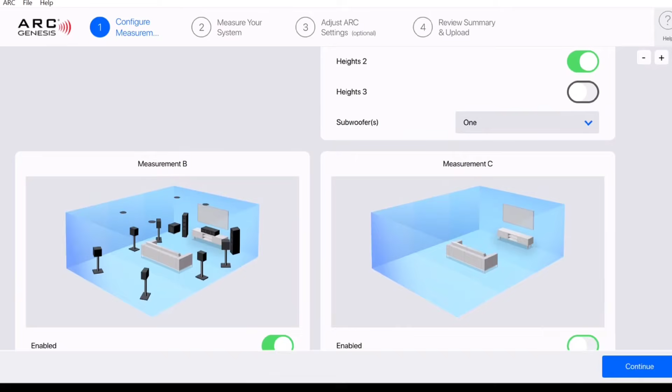Let's go to profile B and let's turn that on. So that's going to give us another set of measurements. Remember, profile 1, or measurement A, is our main profile. That's going to be, in this room, the main listening area or main listening setup for movies. Okay, profile B, or measurement B back here, that's going to be the second profile. Maybe that one's a back row listening position. So maybe we're going to use all these speakers, but the mic is going to be based on another row, not the front row. We would leave all the speakers as they are.

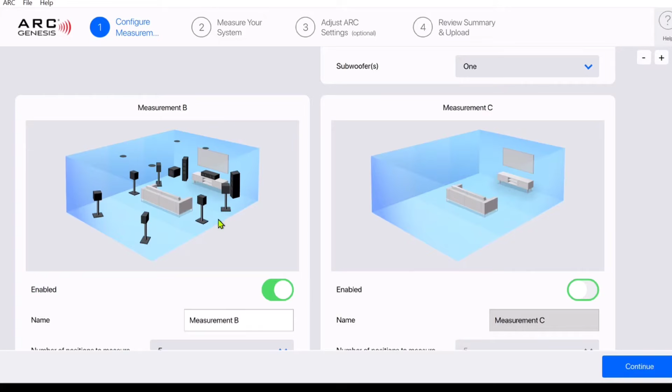Now, if it was a 2-channel profile, we would go and uncheck all the speakers and just have nothing but fronts. All right, so now we've got a 2-channel listening setup with a sub. That's if we had 2 profiles, which we don't. So notice the sub in the corner - that's just for show.

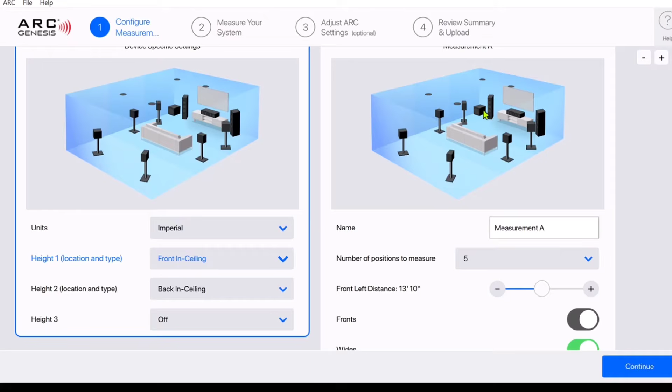It's just saying, hey, we got one sub. Your sub may or may not be in the front corner. We do need to do just a little bit of work. We need to go and measure the distance from the front left main to our ear position at the center of the listening area. So that's going to be right here, dead in the middle.

Now, if you have two seats that flank that, you're generally still going to use that spot right in the middle. Now, if it's all about you, and there's nothing wrong with it being all about you, if you want it to be just about one specific spot, maybe you sit in the middle or maybe you sit just slightly left of the middle, you can measure to that, and that can be your main listening position where everything falls on that one single point. There's nothing wrong with it being based on your spot.

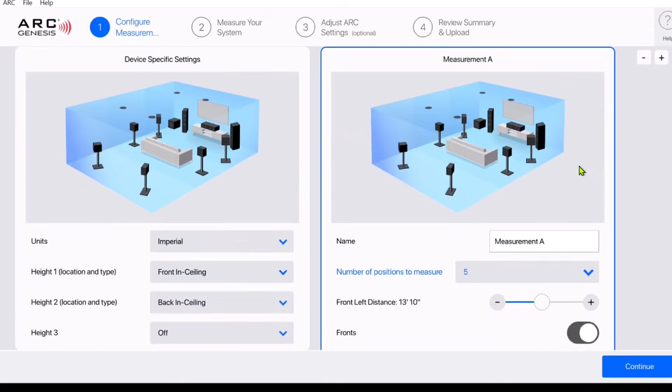Now right here we can select how many different places in the room we want to measure from. You can select all the way up to 10. I would do anywhere between 5 and 8. Down here at the bottom, you'll select how many subs you've got, and after that, you're going to hit continue.

All right, no microphone found. This is kind of common with Windows, especially if you have an update. There's a fix for it, but the updates will mess up your fix. You'll have to go back and do it. It's very easy to do.

When this first happened to me, I jumped on YouTube and found a video from Barrett from Specs of Tech. Everyone say thank you to Barrett, because it's very simple, but if you don't know how to find it, it's not so simple and it'll drive you nuts.

So search for Device Manager. There we go. And you're going to go down to Sound, Video, and Game Controllers. And you're looking for the one that ends in USB audio, right here. Right-click on it, Disable Device. There you go. Now it's going to find your mic.

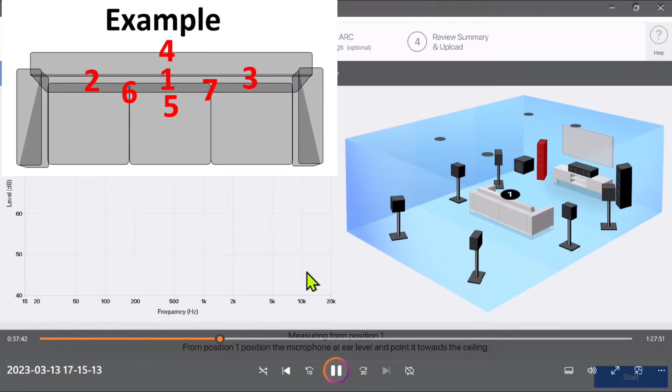Okay, so now it's time to start measuring. So position 1 is going to be pretty much where you see it on the screen, the center of the listening area, the center of the room. So we're going to go ahead, we're going to set the mic there at ear level where the seated head or seated ear is going to be. Make sure it's not blocked by any furniture or seat backs or anything like that.

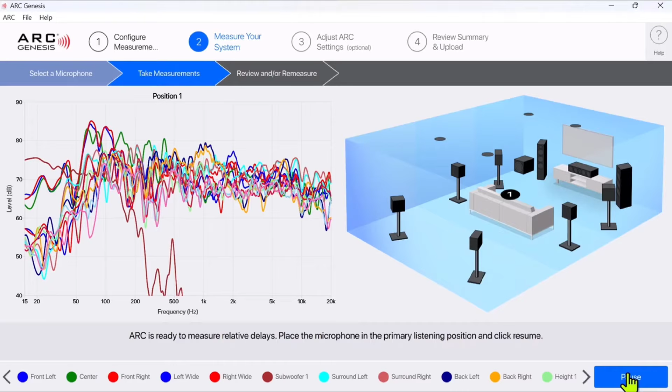Now, as you look at the bottom, you'll see ARC is ready to measure relative delays, and it's going to use the left main as a timing reference. So it's going to play left main, then right main, left main, center, left main, wide, left main, surround. It's using that left main as a timing reference, and this is pretty fantastic. This is something ARC couldn't do for a very long time, and everyone was waiting for it because Dirac could do it. Now ARC and Dirac both do it. It's kind of brought ARC up to a level playing field, and ARC also has some things that Dirac doesn't, which we're going to go over here in a little while.

So now we're into position 2. At this point I'm measuring where I actually sit. I sit on the left of center, my wife sits on the right of center of the room. So this is actually going to be placing the mic at my ears, where my ears are going to be. We do not want to measure, for these initial measurements at least, anywhere other than where our ears are going to be.

Now we're sampling the whole listening environment. We're trying to, ARC's trying to determine what is the room and what is not the room. The speakers should be accurate. The speakers are not going to actually measure like they do on the screen. This is an in-room measurement.

Anytime you see someone post a measurement in room and it's perfectly flat, they have butchered that speaker to make it look like that, and it's not good, because it's similar to if you took your voice into a room and ran one of these sweeps through your mouth, and it was on a graph, and someone said, oh no, we've got to fix all these wiggles that the room has caused, and then they go in and EQ them. They actually change your voice.

Now the source is no longer accurate. We don't want to do that, so that's what we're doing here. It's why we're moving this mic around. We're sampling the environment, sampling the bubble right around where the heads are going to be. We don't want to go too far.

If we use a room mode calculator to place our subs, and we have a good seat to seat response where we have a similar response for the bass at our listening positions, we may know there's a null right in front of us, a foot back, a foot forward. We don't want to place our mic where we know we've got issues, like right here where number 5 is, that's probably where our knees are or where our feet are when we recline. We don't want to be out there. We may know there's a null right there. We don't want that part of our sampling, so we want to keep it where we know we don't have those modal issues, those subwoofer issues.

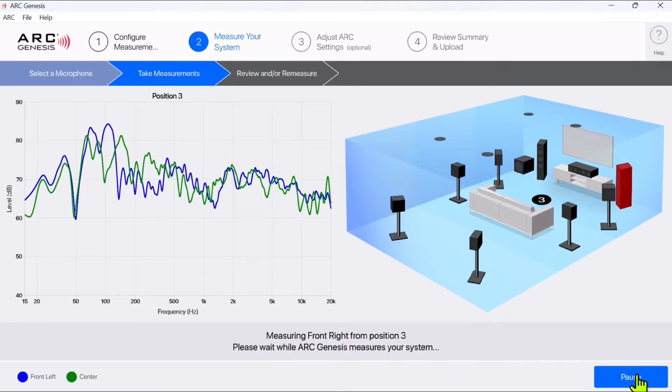So for this one, I would go up maybe where you are when you're seated. A while ago, the first two were maybe when you're reclined. Now we're going to get a seated ear position, maybe a foot in front of the reclined, just to understand where you're at. You don't want to go too wide. We're just getting a sample of the listening area, not the whole room itself.

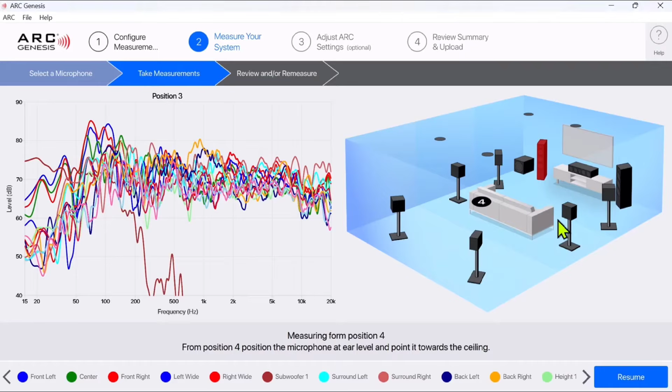Okay, here we are, position 4. Again, behind us, we're never going to sit behind us, so I wouldn't go too far back, 6-8 inches maybe, just right behind the head. If you know there's a modal issue, if you know there is a null a foot behind you, be very cautious of getting too close to it. In smaller rooms, we're kind of threading the needle, placing the seated heads right where they've got to be, so just be careful about getting too far away.

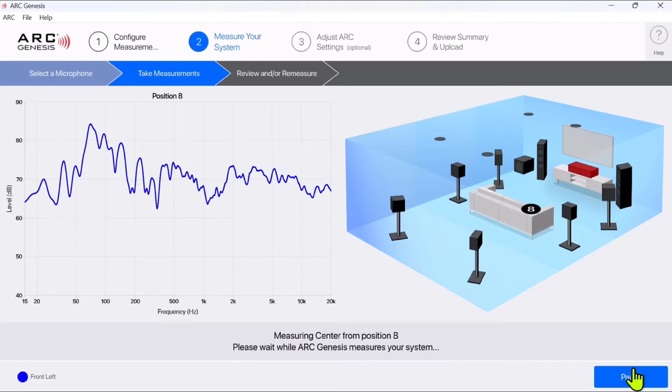Now, if this was a large open area, like a large living room, and you're all over the place, you may want to take that into consideration because your listening area is a little bit larger. You can put the mic between the listening positions and that very center position if you want, depending on how your room's set up. You're just sampling the listening area.

Now, I do want to let you guys know, when I plugged ARC's mic into my computer, it took over the mic that I was talking on. Didn't even think about it, it was a duh moment. So you couldn't hear me during the adjustments I made to my room. I did not, and I'd already saved the file once I fixed it and touched everything up. I saved it, so I didn't want to have to go back and measure my room again.

So I just jumped on Facebook, on Home Theater Gurus' Facebook page, and asked all the guys over there for one of their raw files from ARC, and that's what we're looking at right here. This is the first guy that said, 'Hey, I've got one, I'll give it to you.' So we're going to do his room, and then I'll send him this file when we're done.

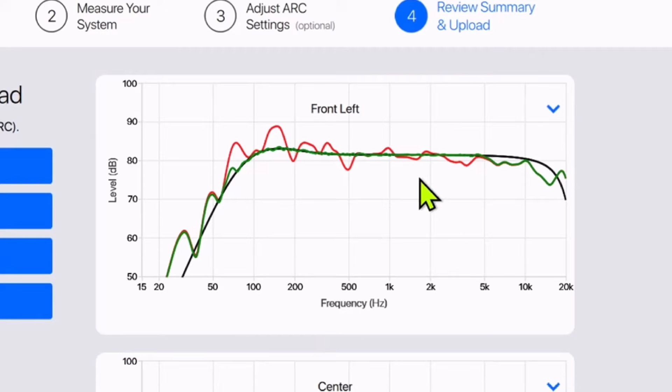But let's go ahead and hit the review button. Now that black line is going to be the target all throughout these settings we're going to be doing, it's always going to be the black line. Now here the red line, that is what the speaker measured, or when we sampled the room, this is what ARC came up with for the front left speaker, the center speaker, the red line. Now ARC EQs by default up to 5,000 hertz, 5K right here. Okay, so now we're zoomed in, but that green line's hugging that black line all the way to 5,000 hertz.

And then look at his response. Now, I measured with REW just to confirm, this is what it looks like. So you're losing all your top end from 5,000 hertz, it just starts taking a dump. I mean, at 10K we don't hear very well over 10K, but still it's not going to sound good. Say he just got the speakers, he's demoing these new speakers in his room, he runs ARC, and it doesn't sound good. These speakers don't have any highs.

Something's missing in the upper end. All along, these speakers may be great speakers - it doesn't mean it's this speaker. It's just the room correction needs to be done. It needs to be finished.

By default, ARC, like most room corrections out there, isn't optimal. We need to optimize our room correction, go in and make some tweaks and adjustments that are going to drastically change the sound in the room. So there's nothing wrong with ARC, we just need to get in there and do some work.

Center channel, look at that - it's huge. These are 10 dB blocks right here, this is 70, this is 80. Look over here, that's humongous.

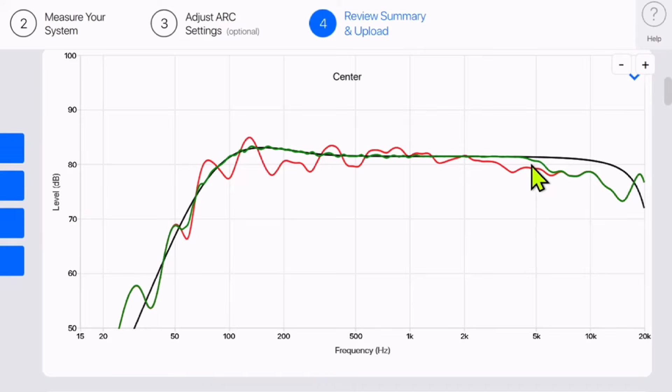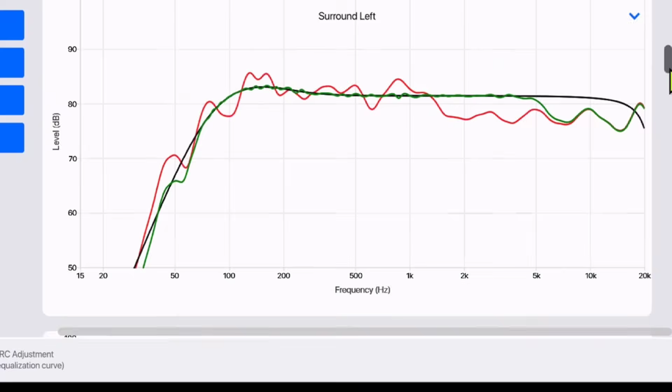Same thing with the center channel, left wide - his whole room. Because ARC, look at that left surround. So his surround, the upper energy, the spatial cues as objects are moving around this room are just not going to sound good. Now we can't pick on this guy's room because this is extremely common.

And the problem is ARC only EQs to 5K. Now that's not an issue, only EQing to 5K - sometimes you may not even want to EQ that high. Sometimes you may need to EQ all the way.

We need to look at it. But then there's some adjustments we need to make to fix what's not being EQ'd, to bring the whole target in line so you have a nice transition all the way across, so we don't have these big drop-offs. So that's what we're going to fix.

So the first tab, set up speaker profiles. We have profile 1. Now if you remember before, we talked about different profiles, and you can have a 2-channel profile. ARC has already measured all of the speakers from this position.

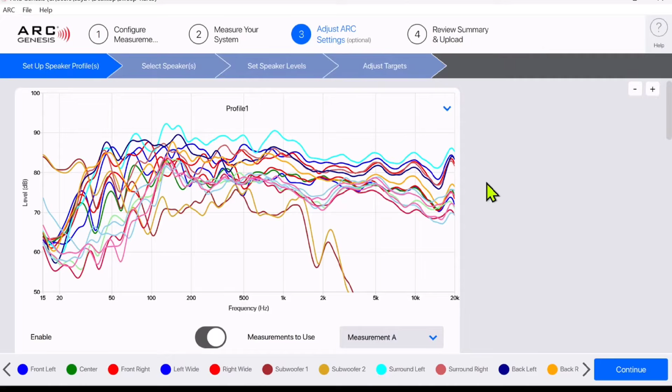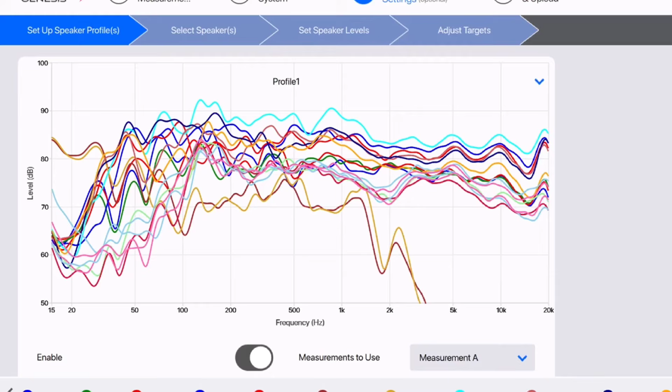Now if you look right here, measurement A, that is the measurement - we took measurement A earlier. If we wanted a measurement B, that would be measuring from a totally different area, like all the same speakers but measured somewhere else, like in a second row or a different main listening position, maybe on the same row but your position, like maybe you sit to the left of center or something like that. That would be measurement B, which we don't have, so there's no option for it. ARC took measurements from one listening position or one listening bubble only because we told it to.

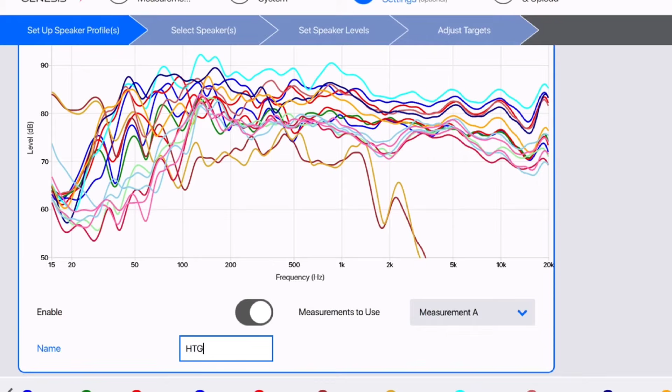All right, so we can call this profile whatever we want. Call it HTG for Home Theater Guru, so the guy knows when he uploads it, this is the profile we're making here. But you can use these measurements from measurement A that were measured in this spot.

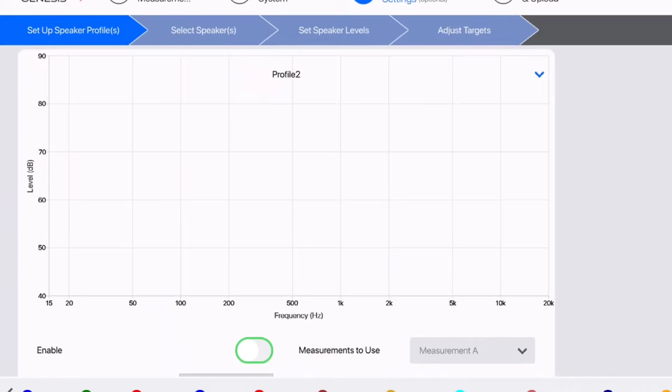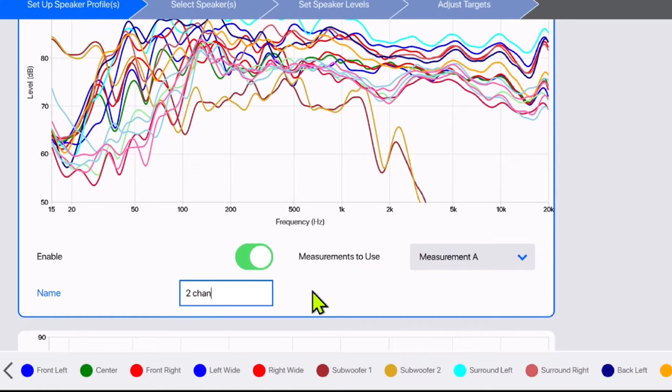You can set up another profile if you want. We can go down here to profile 2, turn it on, and there's all the speakers - ARC has already measured them. So we can go in here and call this one 2-channel. No, it won't let you type out the whole thing, you can't get the L in there, so it's 2-chan.

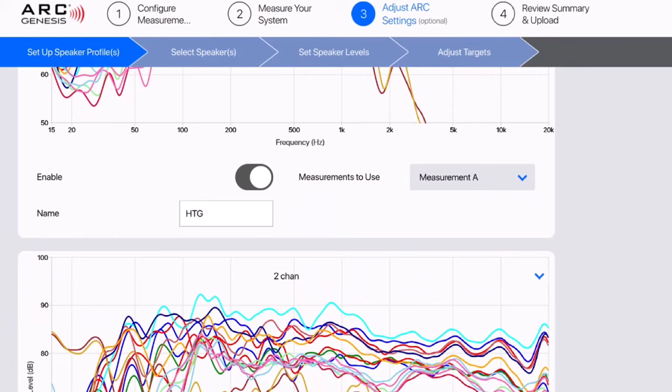So now we have 2 profiles set up - the HTG profile for the whole system, and a 2-channel one. So now we can go here to select speakers. This profile, HTG, we want everything, all the speakers to be played in that profile. Profile 2 over here is 2-channel, so we just simply toggle off the speakers that we don't want. And of course, fronts are required, so we can't turn those off.

All right, so now there's a profile set up for 2-channel. So now we hit continue and we can go ahead and start setting all that up. Now, we're not going to do a second profile because I just want to show you guys how to do it - it's really easy.

Now, of course, if we had different measurements for that 2-channel setup, we would have selected measurement B, because we would have called those B whenever we took the ARC measurements. So you can not only select the speakers, but you can easily select what measurement or group of measurements you want for that profile. Let's go ahead and turn the 2-channel profile back off because we don't want that. And because we turned it off, now it has disappeared from this screen.

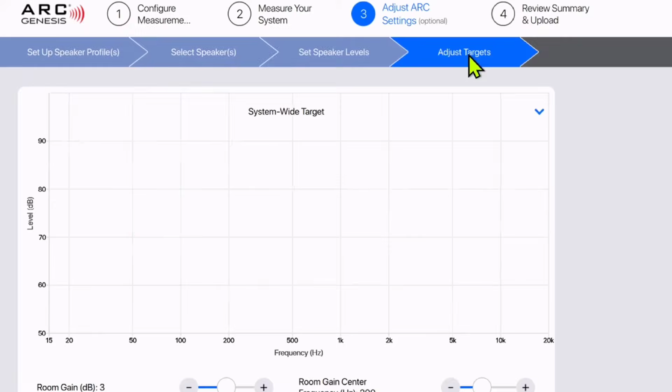Now we're going to go to adjust targets. We're going to skip this one right here, we'll come back to it in a little while. Okay, so the black line is our target. The one on the left, that's our subwoofers. The one on the right, that's our loudspeakers, the LCR, surrounds, everything not a subwoofer. So this is how we want them to measure in a room, the target we want them to follow. This is basically the tonality of your speaker, and we want all of them to follow this response as close as possible so they all have a similar sound. We don't want some to have highs and others to have none because of suck outs and stuff like that. So that's what we're going to be adjusting here.

Okay, now room gain. Let's watch what it does. It's just moving the left side. See the left side? It's basically turning the subs up and down, like the whole channel. Now it's also going to affect the lower end of the loudspeaker response, so it's kind of lifting the whole thing up. So we're going to set this at about 2.

Now this target is flat. Flat does not sound good. We have known this for decades that the human ear needs a house curve to sound natural, to sound good. Low frequencies don't lose as much energy as upper frequencies as they travel over distance. So we can't just have a flat response and have it sound right. It just doesn't sound right. So we're going to have to adjust this target.

Now there's been several studies through the decades, and one of the more recent ones is by Harman. They did blind testing to come up with a target that sounds good. Several other people have done this in the past, so again nothing new, but their target actually just sounds good. So we're going to use the Harman target and mimic it. Now this may not be identical to the target, so if someone sees something like you're half a dB off here, we're just mimicking the target. What we're going to do in here sounds really good, but you do need to tweak it. We're going to talk about some of those tweaks here in just a second.

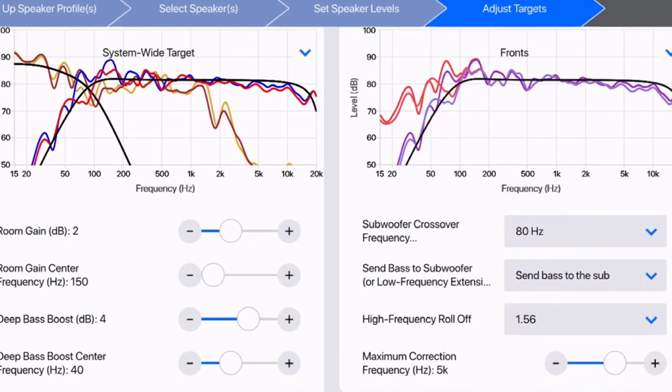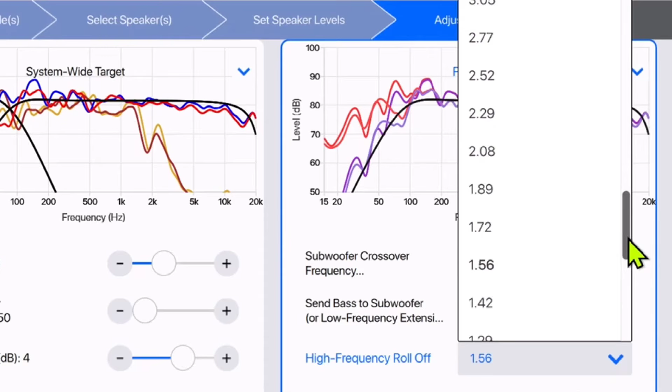All right, so now our subs look pretty decent. We do have a problem because our mains still look kind of like crap. They're still way too flat. We've got a huge roll off past 10K, so we don't want that. So the first thing we're going to do is fix that drop off in the upper frequency. So right here on the section for fronts, high frequency roll off, it's set pretty low. Now ARC just kind of sets these all over the place, so you have to change it for every speaker. We're going to change it to about 8, 7.9.

There we go. Now we need to tilt our target for the loudspeakers. So we're going to go over here to tilt level, and we're going to drop it down.

I'm going to drop it down about 4 dB. Okay, now if we go down just a little bit more, you can see the tilt start frequency is 100 hertz.

All right, so let's go ahead and start looking at our loudspeakers. We need to decide how much we're going to EQ and what we're not going to EQ. First of all, the red right here, that is the speaker as it was measured. This purple, that is it rolling off to the subs. So this slope that we integrated right here, that we built just now, it's going to drop that speaker off like that for the subs.

All right, so now we know what we're looking at. We've got our black line, that's our target. It's all over the place, but when it gets to about 1500 hertz or so, it levels off. It actually doesn't look that bad, it kind of follows our target. Then we drop down—see that little drop?

So I hate EQing full band EQ, we talked about this earlier. It's like EQing your voice—it's not going to measure perfect in any room. So going in there, fixing all the little squeaks and all the little ups and downs, you're changing the source. Now we're assuming these speakers are accurate, but if this dip right here is actually the speaker itself, that is something that we might want to do full band EQ on. I normally would not do it if it wasn't for this. I mean, we would EQ maybe to 2K and we'd be done. So I hate to do it, but we're going to go ahead and do full EQ on this one speaker, and we'll keep on going.

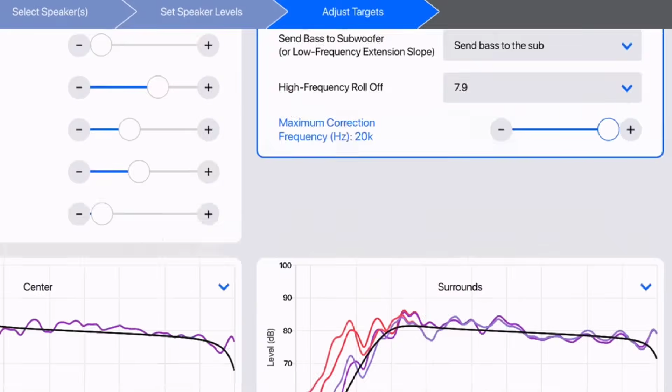All right, so let's go on down. Okay, the center—and the center actually looks really good. We've got to raise up our high frequency roll off. I mean, the center does look good, it's just right around 11K, it just takes a dump.

You know what, let's go ahead and EQ this speaker to 2K. I would probably EQ it all the way, but I just want to show you guys what it's going to look like on the next screen. So we're going to do this to 2000 hertz, only because if you look past there, I mean, it looks great—it's following our line, it's close. It's just right past 11K where we have that issue.

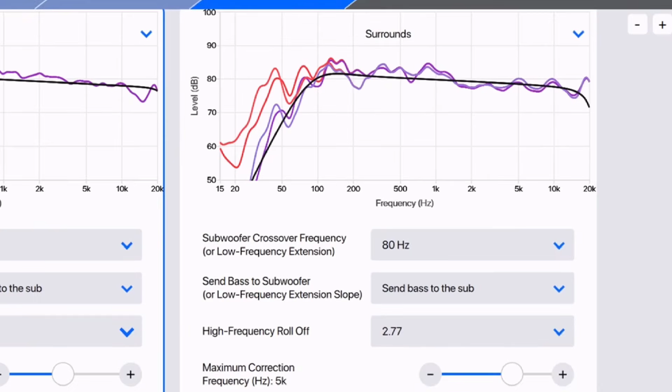All right, surrounds. This surround is not too bad, let's go ahead and fix our roll off. Surround is really not that bad, so we're going to stop this one. We're going to fix all this mess up in here, we're going to do this one at 2K as well.

All right, the wide—it's not horrible, but it's still got that nasty stuff going up top. I mean, that's 5 dB from there to there and then back, it's kind of a mess. But let's just go to 2K. Like I said, I just hate EQing all the way up.

All right, now the backs—and this one right here, I mean, it's almost 10 dB the way it's coming down. This one, we're going to do full on this one. That is a lot of dip. Okay.

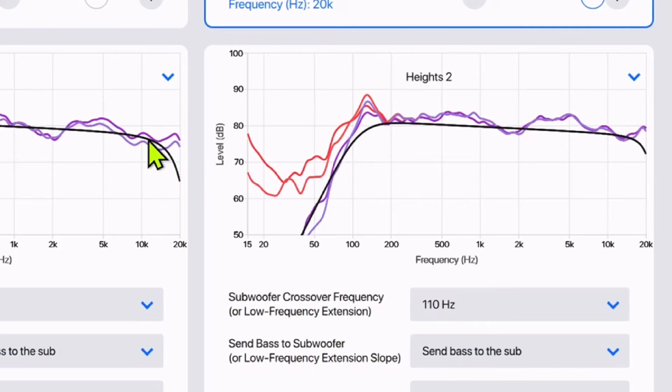Height number 1 doesn't look too bad. That's his top fronts.

We're going to stop the EQ at about 5K, that's not too bad. We'll stop it at 5K for that one.

Height number 2, let's fix that roll off. There we go, it's not really that bad.

We're going to go ahead and EQ this one at 6K, and it's going to fix it right around there. That'll pull that down a little bit. Everything to the right of it doesn't look too bad.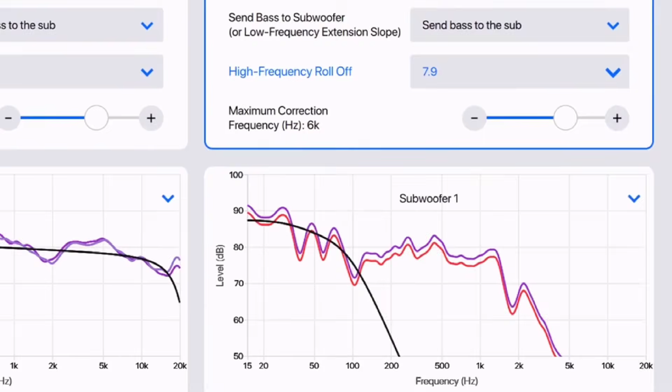Height number 3, this is his top rear. This one, that's a pretty hefty drop. It starts up here. We're going to do full on this one as well.

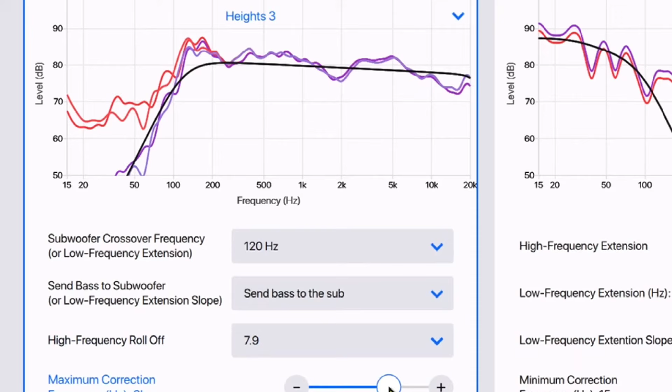Okay, so now on the subs. The first thing we want to do is understand what the LFE channel is, and that's our 0.1 whenever we're talking about 7.1.4, 9.1.6 - that middle number, that is our subs. And it's always 0.1. Just because there's a 0.2 in there, that just means the receiver or processor you're using has 2 outputs. Sometimes they can set delay between the outputs. Sometimes manufacturers just have an internal Y adapter with 2 outputs and they'll call it 0.2 just for sales purposes - it's always 0.1. You have 100 subs, it's still a 0.1, it's one channel. So that LFE channel has content up to 120 hertz.

So we want to make sure we have that to 120 hertz normally, so let's set that for 120. We can see our slope that we set on the first tab for our sub, it's already there. So low frequency extension, that we can adjust how far down the EQ is going to operate - here we're going to go all the way down to 15. Low frequency extension, here it's set for flat.

If you have sealed subs, you may like that. If you have a lot of output super low, say at 10 hertz, and it doesn't roll off any, you may not like it because it's going to beat the snot out of the room and pull you out of whatever you're watching. Because when the room starts shaking, the doors rattling - I mean, yes, it's cool, but it's taking you out of the movie because now you realize the room is shaking. That may not be something you're into. I don't like it, so I like to roll them off. Doesn't matter what kind of subs are in the room, I just like to shape the bottom end.

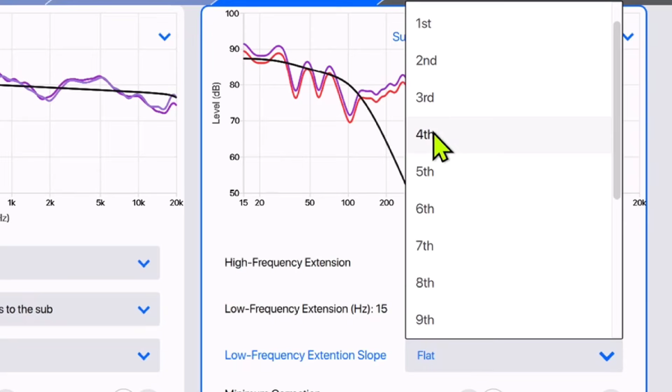So these are the slopes that we can set the bottom end to. See here, we have a first - that's a very gradual slope. When we go higher, it's going to be a little steeper. There we go, I'm going to set it for about a fifth. So that looks nice, around 20 hertz it gradually starts to drop off.

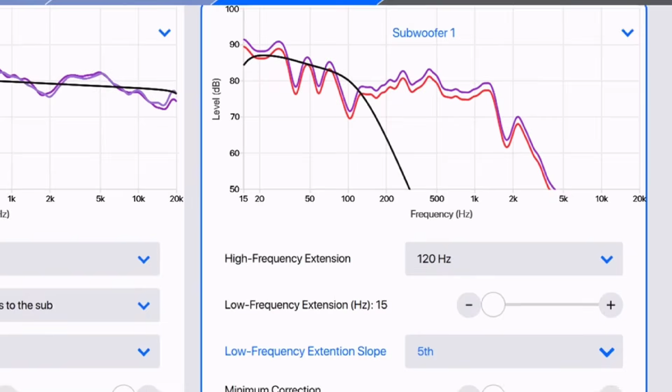So the other one, we need to mimic that, because this guy's got 2 subs that he's using.

Now, if you have a MiniDSP, we're going to talk about that here in just a second.

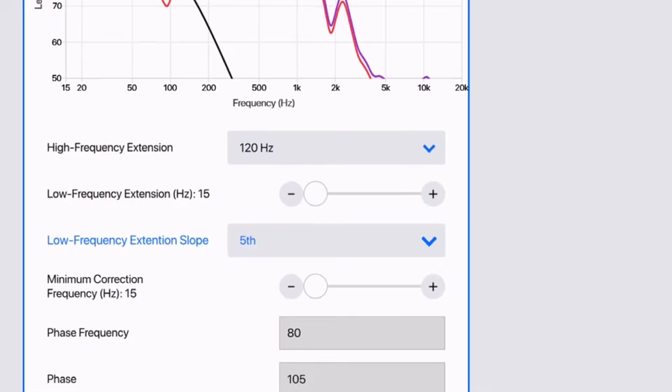Frequency, phase - don't touch any of that stuff. Don't touch distances on your speakers. When you do all that, you're actually taking your speakers and subs out of alignment. Subwoofers are never actual distance, so if the distance looks crazy, looks too far away, too long, don't change it. It's right, it's a timing - it's distance and time, or how long it took for that impulse to get back to the mic. That's what it's measuring.

So let's say you have a mini DSP. I have one in my room, and I show my AVR or my Anthem AVM 70 one subwoofer. The reason is because I want to be able to align them myself and make sure I have a good seat to seat. I'll show you my seat to seat a little bit later on when we measure with Quick Measure and ARC and show you how similar it is.

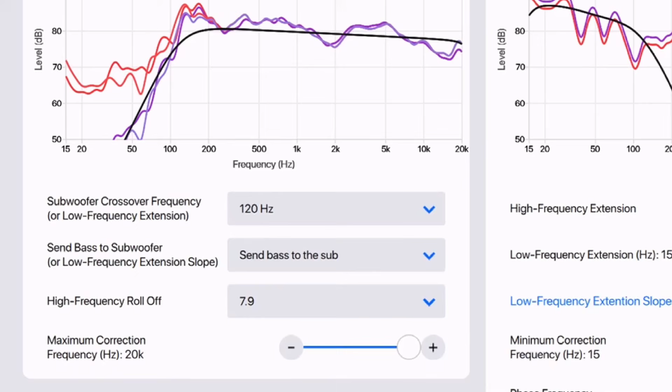Here we have one sub, and we've got a subwoofer 2 down there. We don't really know what they're going to look like when combined, because when two subs play together, they influence each other, and the response is, they're working together. They create what's called a virtual sub in the room.

So if you're using something like a Behringer or a MiniDSP and you're measuring with Room EQ Wizard, and you want to set your house curve, you can do it very easily. All you have to do is go to minimum correction frequency, and that's going to tell ARC, hey, do not EQ below 120 hertz. If we want to go higher than that, we can adjust it here all the way up to 250, and this will allow you to push that slider all the way up to whatever frequency you selected there. But be aware, there's no reason to do that.

If you've got a good seat to seat with your mini DSP and you measure correctly when taking your sample measurements in ARC, you can do your house curve here. You can sit in your living room, play around with ARC, adjust the house curve, upload it, listen to it, adjust it again, listen to it. Over and over, it's much, much easier to use.

In episode 7, where I walked you guys through using a mini DSP, I even told you if you're going to follow this with room correction, you need to EQ flat to give the room correction what it wants. You would not EQ a house curve in your mini DSP, you would EQ flat in your mini DSP, preparing it for ARC or Odyssey or whatever you're using for room correction.

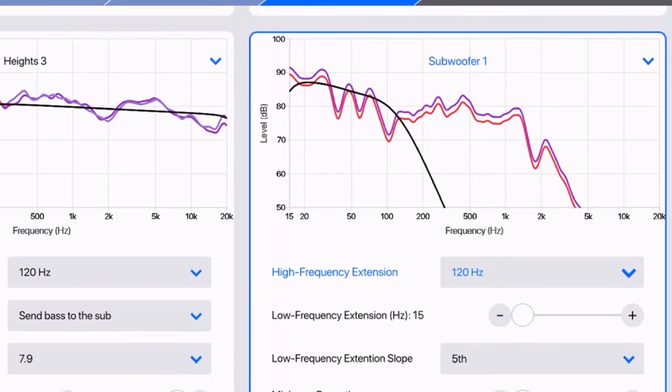Okay, now one more thing on the subwoofers. You can do this in a mini DSP as well, but let's say you have a near field sub and it's annoying you because it's too audible. You got the subs gain matched, so they're both working equally as hard, but the closer sub is just, you can tell where it's at, it's localizable. Now the reason is because of the upper energy in that subwoofer.

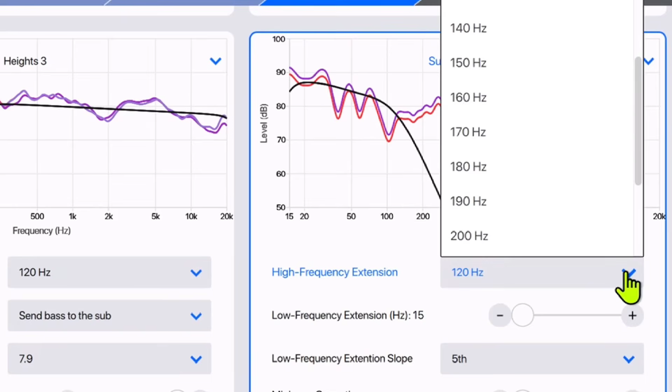This area right up in here, the upper end of the subwoofer, is what we can hear. The lower we go, we can't really tell where those super low frequencies are coming from. So instead of turning that sub down, which we don't want to do because then it's not helping down low where we really need that extra output, we can simply change our high frequency extension. Watch this area and watch what happens. Let's change it from 120 to 90. You guys see that? The upper end that was annoying, we just turned it down, but we didn't touch the lower area, from 50 hertz and down is still the same. That's going to make that sub much, much less audible.

Now this is a trick I learned from Valencia Seating. It's one of those things that you hear and you're like, duh, that makes perfect sense. It's just a great little hack, so thanks to him for sharing that. So let's go ahead and turn that back up to 120.

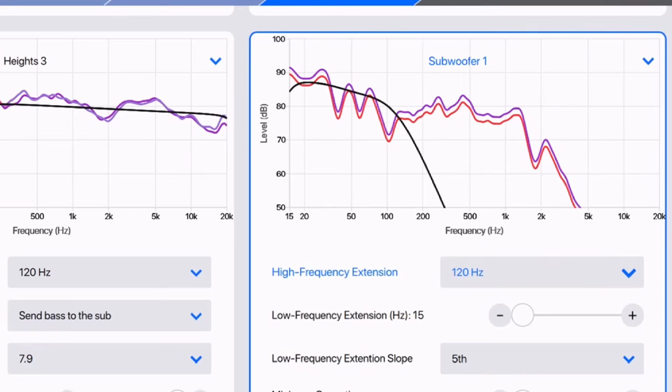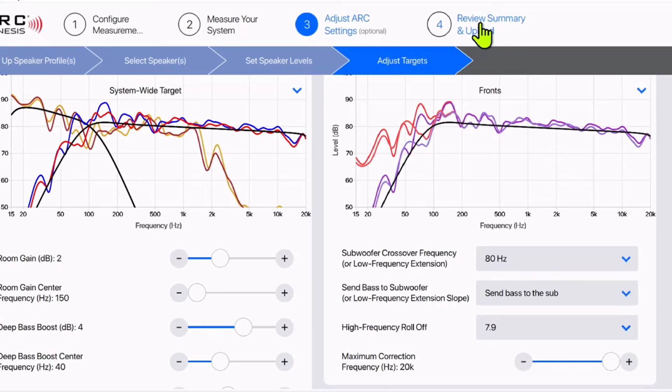All right, our targets are set. We've got our speakers EQing where we feel like we need to EQ, but not where we don't need to. So let's go ahead and move on to the next page. Remember, we can always come back and adjust this. We can adjust for more bass if we want to. You can also adjust the bass at the subwoofer trim, add a couple dB if you feel like you're missing some bass. Come in here and mess with the deep bass boost, give yourself a little bit more house curve. Feel free to play around, there's nothing wrong with adjusting these targets a little bit.

All right, so let's do a review and summary. Now this is similar to what we saw whenever ARC got done with it initially, so we're kind of looking at the same thing. Now, of course, this front left, we did full EQ, so it hugs our line perfectly.

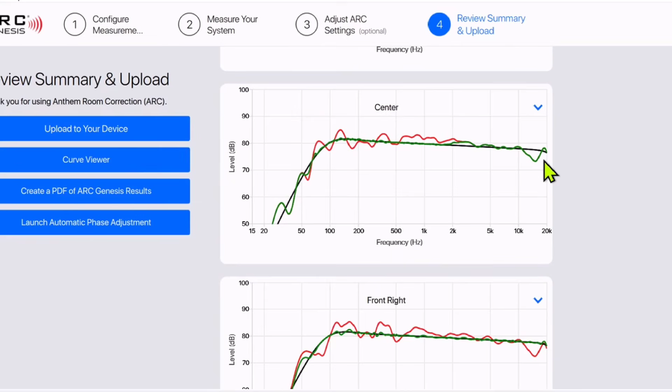We don't always want to do full EQ. Okay, our center channel, we've got a dip right here, which we already knew was there. Now, I kind of wish we had fewer speakers that we had to do full EQ on here, but here's one.

We stopped this one at 5K. Now, if you look, our response gets to about 5K, then it starts to kind of lift up. The center of those ups and downs really need to be following our target, and it kind of bumps up there. I'm going to show you guys how to fix it, but I think I can find one worse.

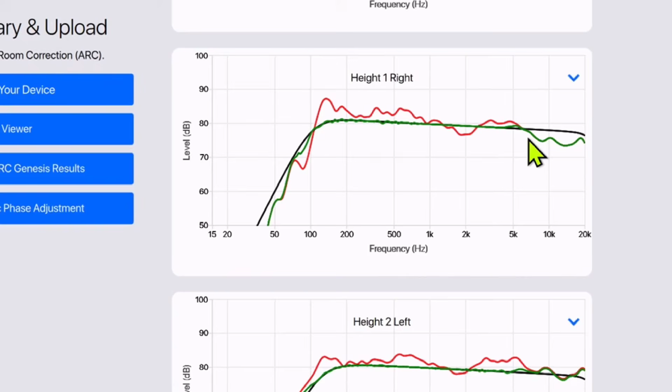There we go. All right, look at this height one right. Now, if you remember earlier, whenever we saw what ARC did, most of our speakers look like this. They had big, huge drops. Now, there's a very easy way to fix that.

So we're going to go to height one right. Now, this is his top front right. So, I mean, it's not going to sound good. It's not going to sound anything like the other speakers. You look at his top front left right here, height one left. It looks much different. It's following the line pretty well. So this one's going to sound good, but this one's just not going to have, the highs are gone. The spatial cues are really going to be missing on that right top Atmos speaker.

Now we can just look at it and kind of decide. So here we want to go up, and we need to go about 3 dB, call it 3.5. Set speaker level.

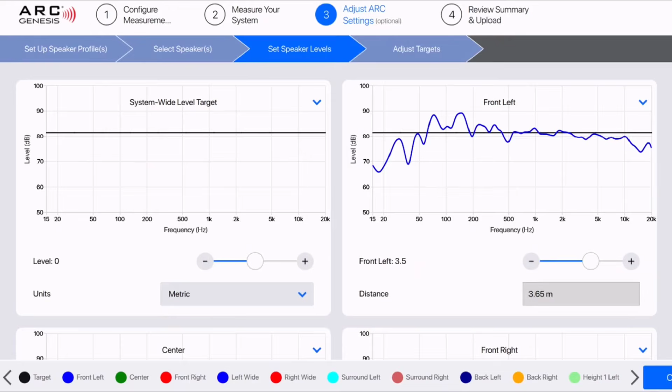Okay. All right, height 1 right. Now we do have a peak right there at 5K. This is still going to sound good. It's going to sound a lot better than it did for sure.

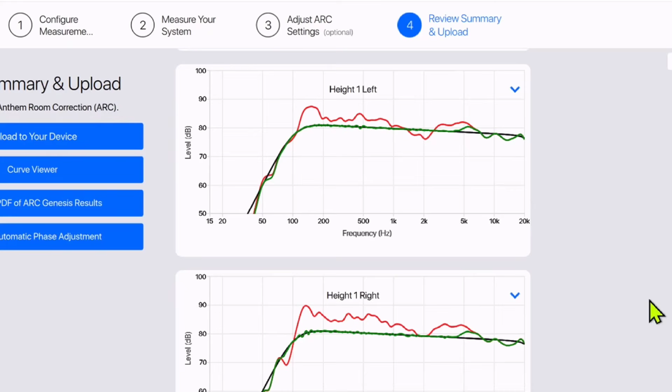But now if you look at the height 1 left, they're going to sound very similar. So I'd probably go and change this one as well. Knock that little hump down on both of them. Extend my EQ out to about 6 or 7K. Heck, let's do that.

Okay, we just changed it to 7K. Go back and look at it. All right. Now that looks much better. We had that little bump right there. Now it's completely gone. So that's how you would basically go through all of your speakers, and you're just going to verify that everything looks good.

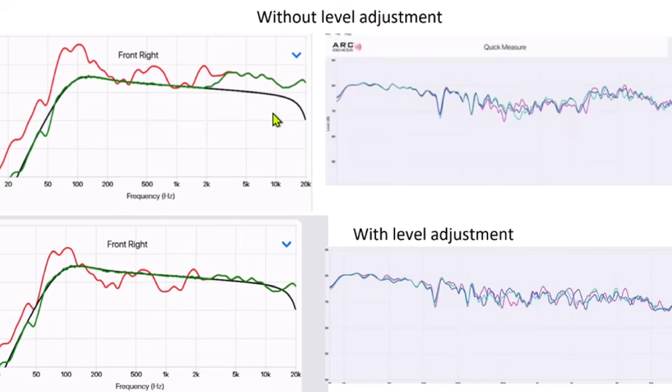Now, the section on adjusting levels is so important. I'm going to do it here on a raw file, the same file we've been working on, but this one is back from the beginning when it was raw. I want to show you again there's two different ways we can adjust our levels to get them back up to our target - a slower way and a really fast way. But remember how drastic they were, how they were all dropping past 5,000 hertz - they were all really bad. Just keep this in mind, how all these speakers look. Remember, ARC defaults to 5K, so they hugged the line and were just dropping like tanks. All of them looked really, really bad.

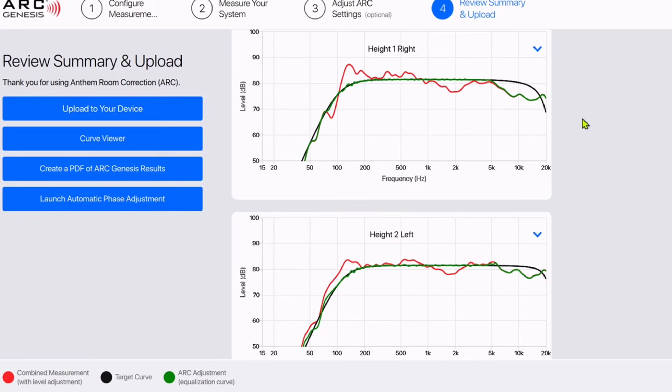Just look at that, look at the height. Height 1 right was horrible. They're all really bad.

So what we can do is go to this front left, first speaker. If we need to go to our black line, that's our target - now this target is not corrected, so it's not the target we want, this is like ARC's default target. We need to go up about 2 dB. Remember, these are 10 dB blocks, 70 dB, 80 dB. So we need to go up about, let's say, 2.5 dB.

Now we're only worried about what ARC is not going to correct. ARC has already corrected all of this green line - see, this red line was the original, it's already going to fix that. If we'd EQ'd to 7K, we'd only be worried about 7K up. So we're only worried about the non-EQ'd section. To get that non-EQ'd section, we need to go up about 2.5 dB.

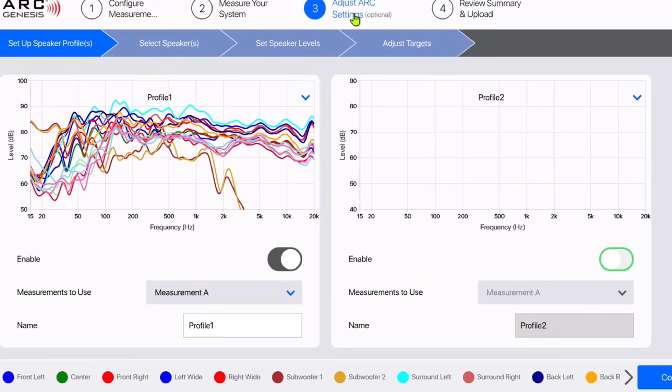So watch this - well, you've already seen this, we're going to do it again real quick. Okay, now let's go back and look at it. Okay, looks good.

But there's a much faster way. So you can take your time doing that, or you can run through it really quick and then just do some small adjustments. Just go to it, hit speaker level.

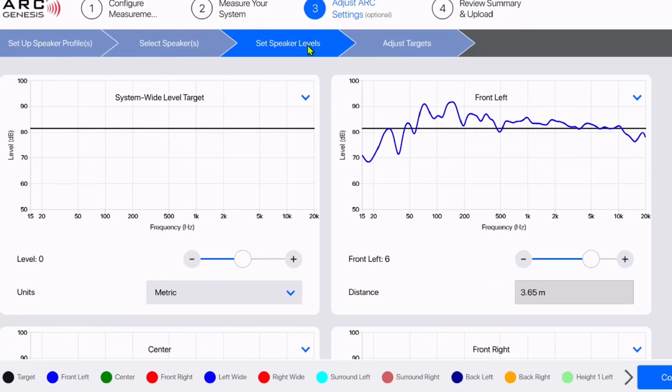Now remember, ARC is going to EQ from here back, from 5,000 and down. Now this is the default response, so we're not able to see the corrections, so we need to kind of remember where our corrections are. This is default ARC, so it's 5,000, but if we had gone to 7K, we need to remember that we did 7K, so we're only worried about what's to the right. But on this one, it's going to be from here. We need to bring that up to the line - let's go ahead and do that.

So we want to kind of center everything past 5K, center all the little ups and downs on our target. Now these have this dip - we don't want to center that, everything would be up here, but then that's going to remain too high.

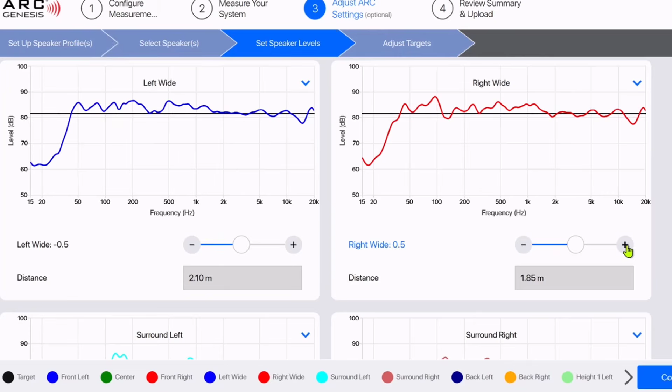So again, this is just to show you how to quickly run through here and get your level set. Front right, same thing - I'm just going to get this section up to our line, kind of center the wiggles. Left wide doesn't look too bad there, we're going to center it right around there. Right wide, lift it up a little bit. Surround left. Okay, surround right - it's almost like playing a video game, I'm trying to split the wiggles on the line.

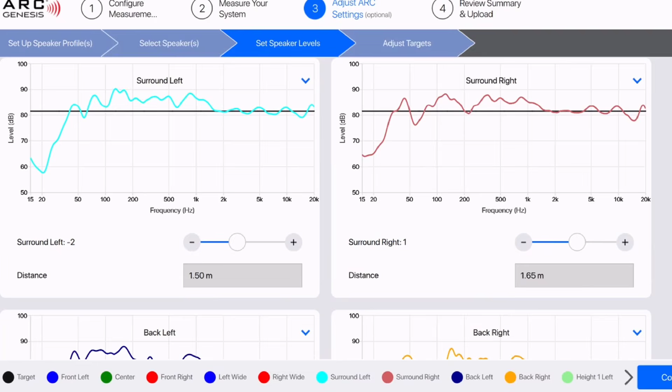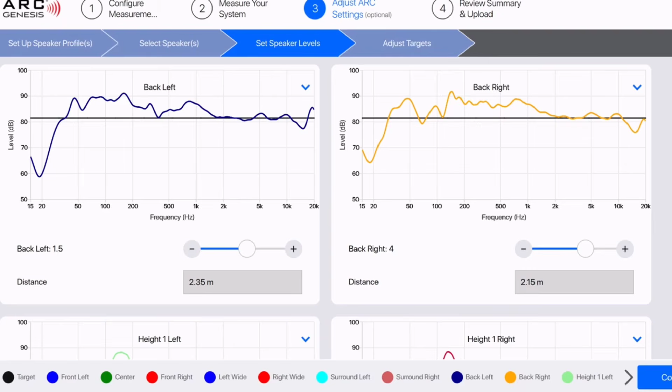Now, what he had before, just doing this is going to be humongous, because before his responses were dropping off, no highs, all lows - I'm not going to say the rest, but anyway, 5,000 hertz right here. Let's go up a little bit more. Okay, so his system just doing this would sound vastly better, more linear. Of course, he has no house curve, so it's not going to sound great, but he would have the highs his system was really lacking when he got it directly off of ARC's room correction.

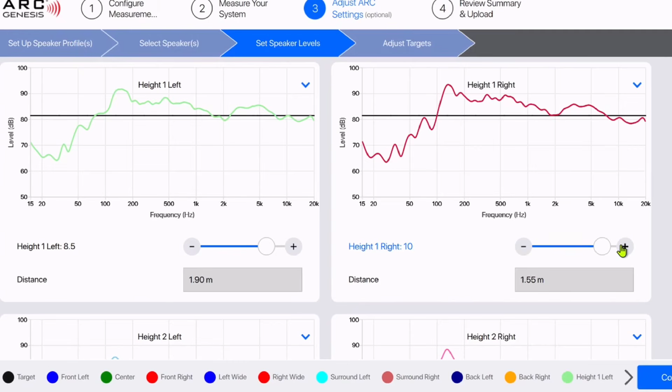Okay, this one's probably going to have a little hump right there. Now, like this one right here, we're going to - 5K and everything is getting EQ'd. Remember, it's also going to pull down - it's not going to create a brick wall right there and pull it down, it's also going to pull that hump down with it at 5K a little bit. So that hump's going to not be as bad as it looks right there.

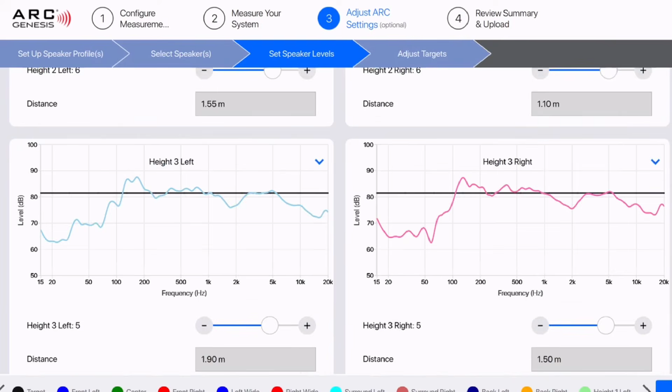This one's still going to be ugly, but we're going to make it look as best we can. Remember, we also want all of our speakers to somewhat follow our target, so they somewhat have a similar tonality. All right, let's check it out.

Front left, of course, that one looks good. Front right, or that center. Center looks pretty good, we could bring it down a little bit, half a dB, maybe a dB. Front right is dead on. Now remember, past 10K we don't hear as well, so even without doing full EQ, this would still sound good. He just needs, of course, a house curve. Flat's just not going to sound good.

The left wide, those were really bad. Now they're not too bad. Nothing to write home about, but the system would sound so much better just adjusting these levels.

Now these are not level matching, we are not matching the system. That's going to be done in the next step. Back right, these would probably lower them a little bit. We're above our black line, so we would drop it down a few dB right there.

Okay, we still have a hump right there. Now remember, that's how high it was, so it did pull it down quite a bit past 5K. And maybe drop that one down a little bit. Of course, we would actually EQ this one out to about 7K if we were doing our works and actually tuning the system.

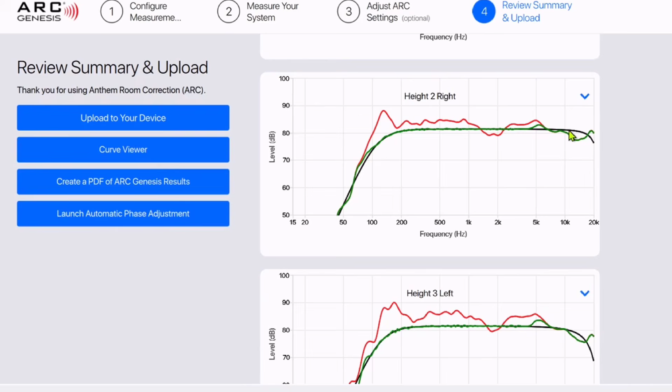Height two right, probably raise that one a little. Of course, we EQ it out a little further than 5K.

Now, I've never heard anyone ever talk about adjusting your levels to that black line. Most of the time, people just load it straight up. But you definitely want to do that, it makes a huge difference.

Okay, before we upload this to the Anthem, we do need to launch the automatic phase adjustment. So hit this, it's going to walk you through it. It's very simple, you just put the mic in your main listening position, and it's going to phase align the subs to the mains.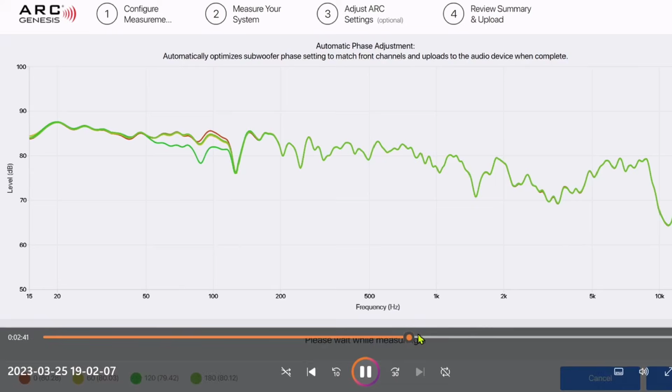All right, so let's go ahead and upload it to our device. And after that, it's time to jump into Quick Measure, and we're going to look at all of our speaker levels and make sure everything is matched.

Now we're going to go to the home page and launch Quick Measure.

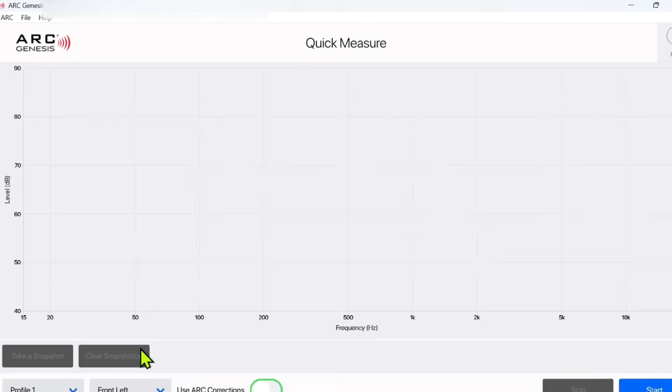All right, so it's time to set our levels. We're going to start with the front left. If you look over here at the bottom, it says 73.42, so we need to add a few dB because we want to get that to 75. We want all of our speakers, except for a few, as close to 75 as possible.

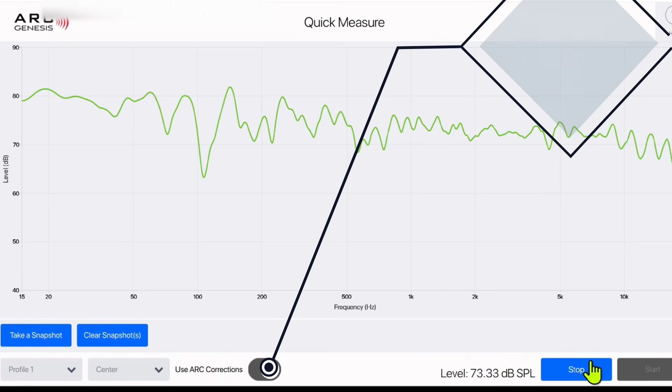I'm going to go back into our IP interface, and we're going to go to every speaker and make sure they all reach 75 dB. Here we're doing the center channel, see, this one was 73. So we're going to go to our IP interface, and we're going to bump the center up just a little bit.

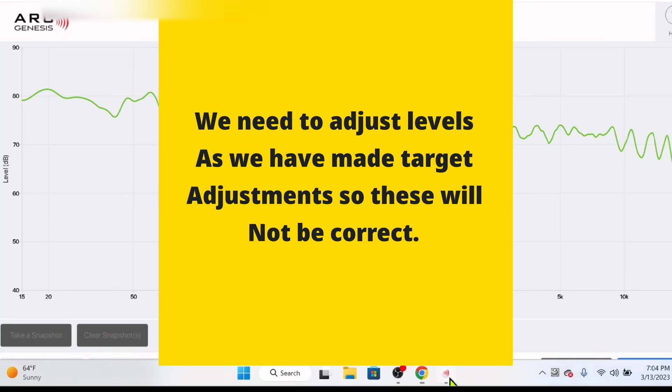Let's go ahead and measure it again. We want it as close to 75 as possible. Okay, can't get much closer than that.

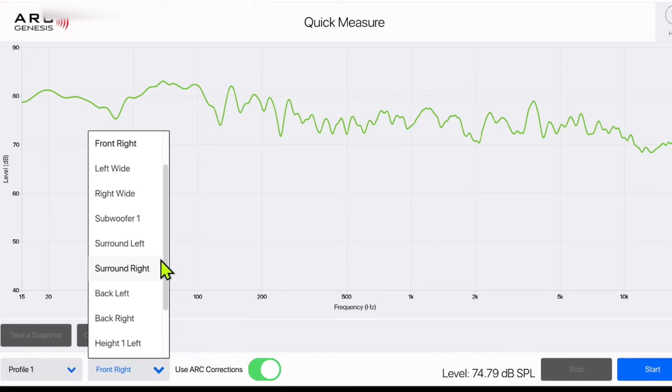Okay, our front right is 73, so we're going to raise that one about a dB and a half, 73.37. We're at 74, basically 0.8. I'm not going to get any closer than that, so we're going to go ahead and leave that one there. You cannot tell a quarter of a dB or 0.21 of a dB.

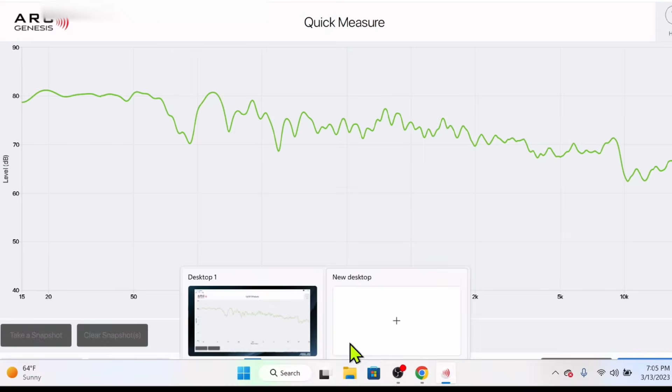Now again, I'm having to voice this over because my mic was not usable when I was doing these readings. So you're just going to go to every single channel, and you're going to make sure they're all as close as you can get them to 75 dB. And that's going to be calibrated for reference.

It doesn't take very long at all to do this. You do want to let it get a few sweeps until your SPL level kind of stabilizes. You'll see it happen, it just takes about 2 or 3 little sweeps in the room for that to happen.

Now notice your back, left, and right. I'm going to boost these a little bit. I use an Atmos test disc that has wind and sounds moving around the room, and that's what I use to adjust the rears by ear. Your mic doesn't have the back of earlobes like we do, and usually you have seat backs as well, so it sounds a little better to boost those just a bit. We're going to raise these about 2 dB, so our target's going to be about 77, and we'll test in room. That's just a good starting place I've found.

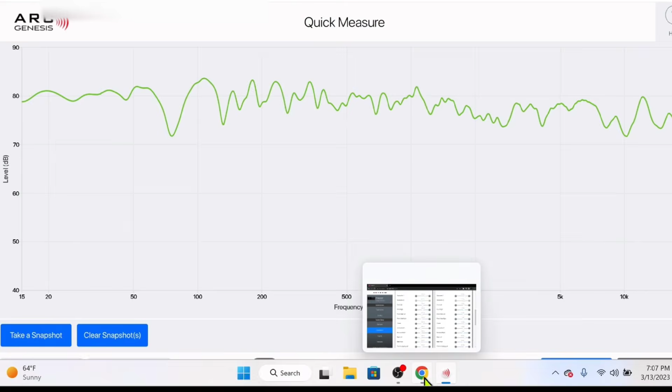Okay, it's a little hot, 77.77. I'm going to lower it down about a dB. Alright, 76.7, that's perfect. Let's go ahead and do the back right.

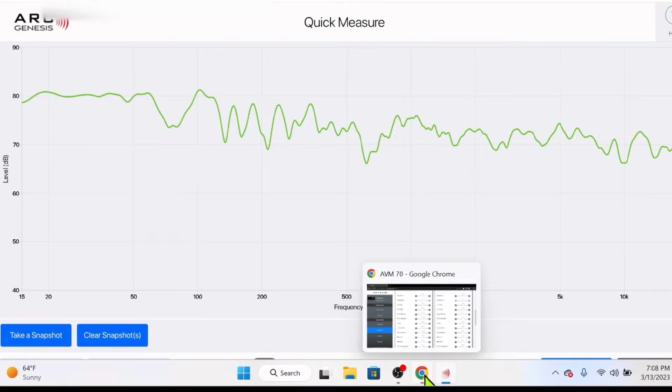We're going to do the same thing. Now you can also bump up your top rears because they're kind of behind this, maybe a dB, but don't go too much. And your center channel, for goodness sakes, do not bump your center channel up if you have a treated room. If you've got a treated room, you should have already taken care of the issues that make it hard to hear the center, which force some people to boost their center channel.

You want your entire system to be level matched. You want it to sound the same as objects move around the room. Don't boost your center channel. If you have problems hearing your center, you've got acoustic issues in your room that you should address. Just turning the center channel up also turns up those issues. That's not really the proper fix. Now, if that's what you've got to do, that's fine, just not ideal.

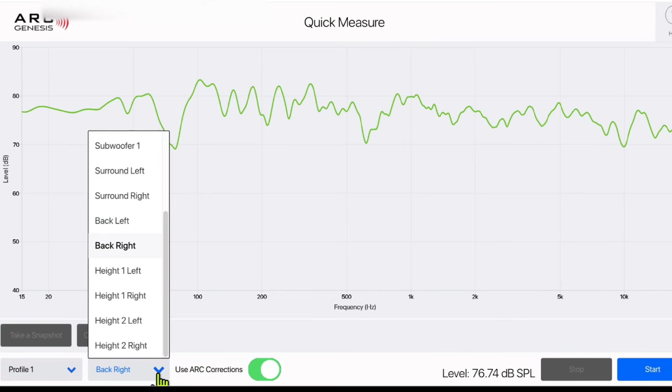Alright, we got 76.3 on our back right. We're going to bump it up half a dB. Perfect. Alright guys, so after you've done that, you can play with this tool, move your mic around, kind of see what's going on in the room.

Don't get too stressed out about all these little squiggles. Remember, we do not expect the speaker to measure flat in room, so don't let that stress you out. Once you get to this point and everything's level matched, it's time to really just kick back and go listen to your room and enjoy it.

If you had some decisions to make about whether to do full band EQ - say I had a little dip at 10K - you can listen and see if you have any suckouts, if your upper energy is missing. You might want to go and do a full EQ, extend that EQ all the way to 20K maybe. We had that issue in the guy's file we looked at a few minutes ago.

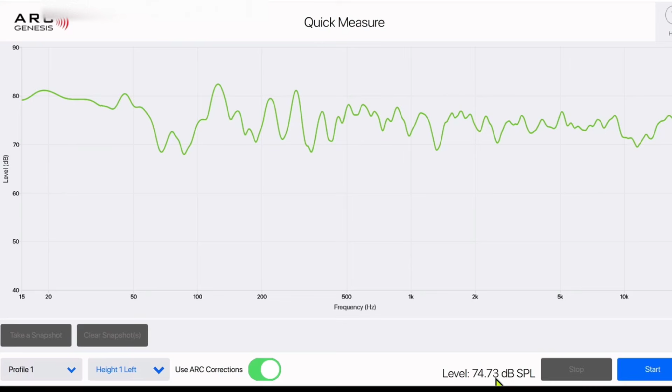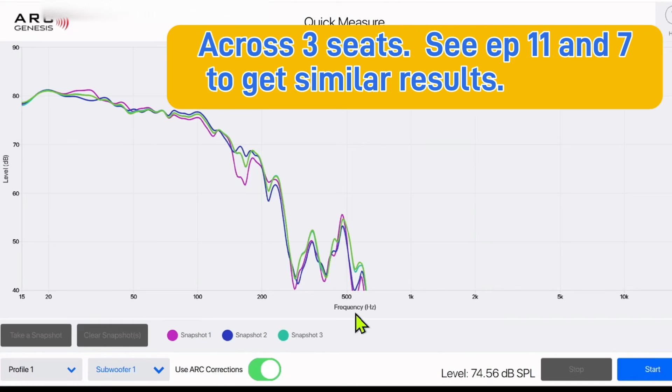So you can tweak it. The bass is not quite heavy enough, you can turn it up, you can actually turn it up at your subwoofer if you want. Bass is kind of something we adjust to taste. Here I am back showing you the subwoofers. You can see my sub level was 74.56, I did boost that up a little bit. If you want a little more bass, you can come back here and raise it up to 76. Go through your IP and just kind of boost it up a little bit. Don't be afraid to play with the bass.

Alright guys, so hopefully this video has helped you understand how to use ARC and your Anthem, and how to go in there and make changes and adjustments to get it sounding like you want it to sound. ARC is a fantastic room correction software in general, you just have to learn how to use it. It's not that complicated once you get in there and get your feet wet.